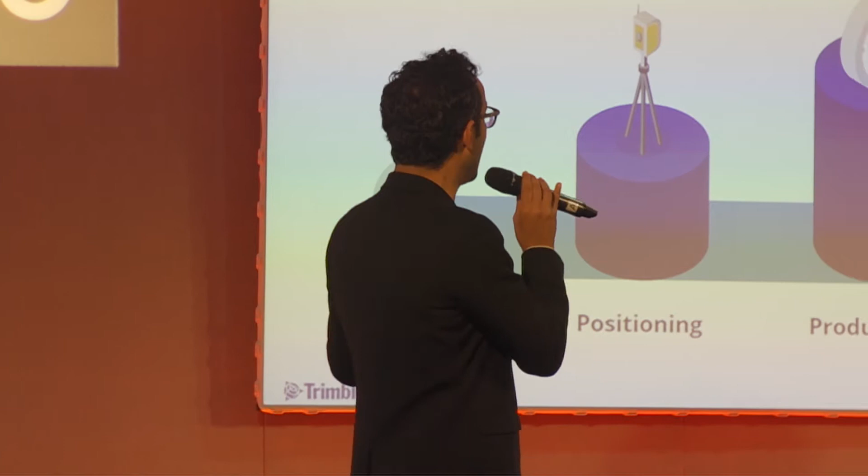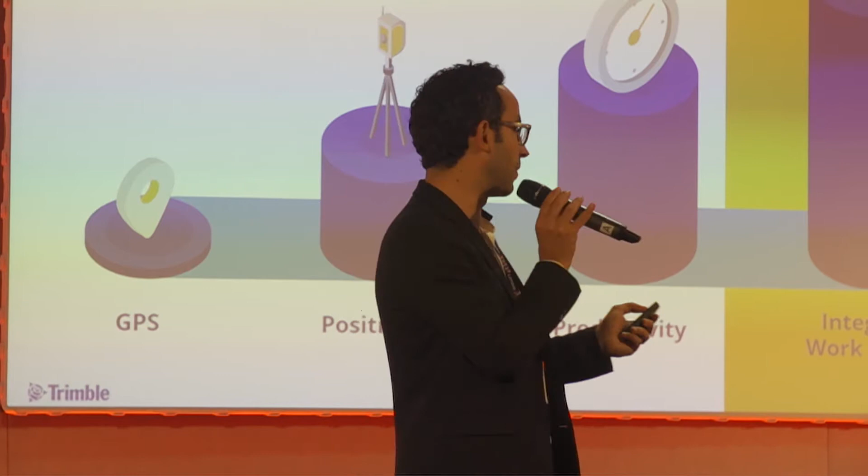But then we started addressing different profiles in the construction business. One of the first communities addressed was the surveyors, but then we started developing specific tools and software for the designers, no matter whether we talk about architecture, structures, MEP, and so on. And then after serving those communities, we started looking at the in-between, the connectivity between design and construction, between sub-phases, between trades, and so on. That's what we call the integrated work processes.

So we believe in this ongoing digital transformation, and we believe that this transformation will only be stable if it's positioned on 3 legs. One of them is the constructible. So today, the technology given to designers allows them to mimic what needs to be constructed. So we are shifting from this paradigm of just building a bunch of documentation to describe a building to something that's high fidelity, one-to-one. This is what we call the constructible model.

We believe in the content, the fact that we could mobilize manufacturing details in the early stage, and today you see there's a big trend of accessing not only 3D components, but also the knowledge from industrial people that could be mobilized in the early design stage, and the connectivity, which is, I think, one of the key drivers that will help to reshape the construction business.

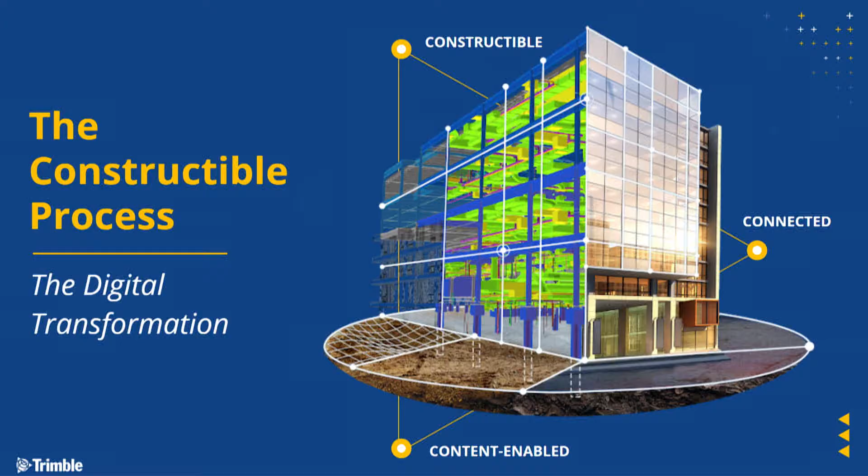This is an organization that I came from called Gehry Technologies. Initially, it was founded within the design side at Frank Gehry's office in Los Angeles. So we've been working on bridging the digital and the physical world, first of all between those physical models and the digital, with a very interesting combination of low-tech and high-tech.

So I have pictures from the early 90s where we have model makers, and then we reshape, bringing it into the computers and trying to mobilize other knowledge, such as mathematics, and then bringing it back. So I think this is probably what I found as a driver across all the presentations I attended this morning, trying to build this bidirectional link between the digital and the physical worlds.

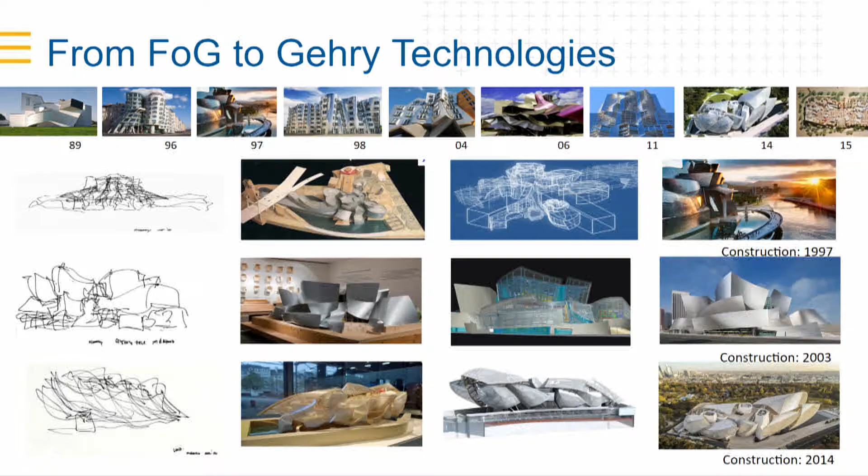So that's what we did within Frank and his project. We had been operating as the R&D group in the early 90s, but then we spun off and constituted our consultancy and service group, and we started working with Frank's ecosystem. Every project has designers, builders, and subs. Then we also started working in different geographies, and we expanded.

And we've been honored to get an international award three times for this BIM movement that you all know about. And we are taking one more step in our integration inside Trimble, and Gehry Technologies has been rebranded Trimble Consulting since last year.

So we've been seeing a lot of great stuff moving between those multi-realities. Reality is not only one, it's multiple, and we believe in each of them. VR, which is a fully immersive experience. We are working on the AR side as well, with partnerships like the Tango project with Google. And today the main focus will be mixed reality, which is the one-to-one overlay between the physical and digital world. This is another program that we are doing with Microsoft.

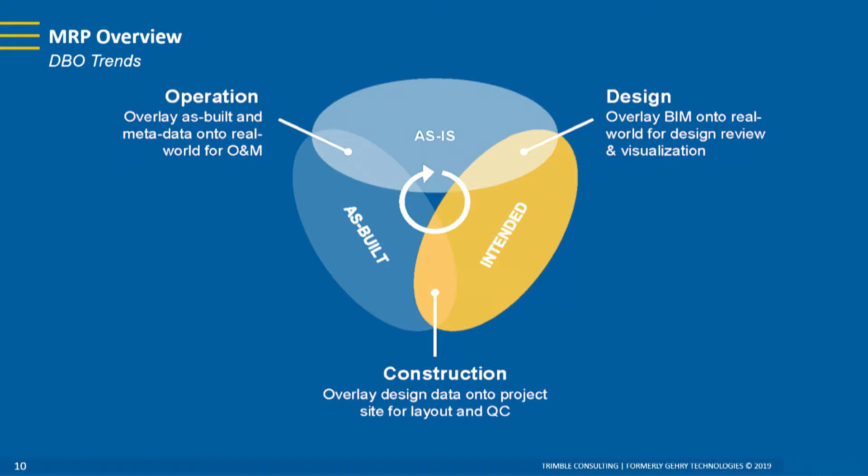I just put together a few examples of what we are doing in real life with customers on projects applying mixed reality. Number one, as a principle, we are working on what we call the democratization of 3D. 3D and BIM are not something for specialists, BIM managers, or highly skilled, sophisticated project audiences. We believe these things need to land in everybody's pocket, from workers to executives, with no distinction. We believe technology today is mature enough to arrive at this one-to-one scale overlay between what has been designed and what needs to be built.

And what we are addressing is what I call the key processes. Whether you put up a house, fancy towers in Dubai, or an airport, all those projects are driven by processes like design review, design coordination, construction sequencing, and comparison between planned and actuals.

So we associate the mixed reality to those key processes, and we found partners, clients, just to work with them to reshape and re-engineer those key processes.

Next, please. So definitely there is a wow factor when we adopt those new technologies. But these wow factors just get out after a few seconds. It's not even a few minutes. So what we try to find is people that are addressing a specific process or workflow and work with them to project the mixed reality technology within their existing practice.

So we have examples that we're going to walk you through, done with designers, done with engineers, with fabricators on construction site. And our role as Gehry Technologies is working side by side with the Trimble folk. We always had this mixed blood, having people, engineers, architects, computer scientists. We've always been working on system integration.

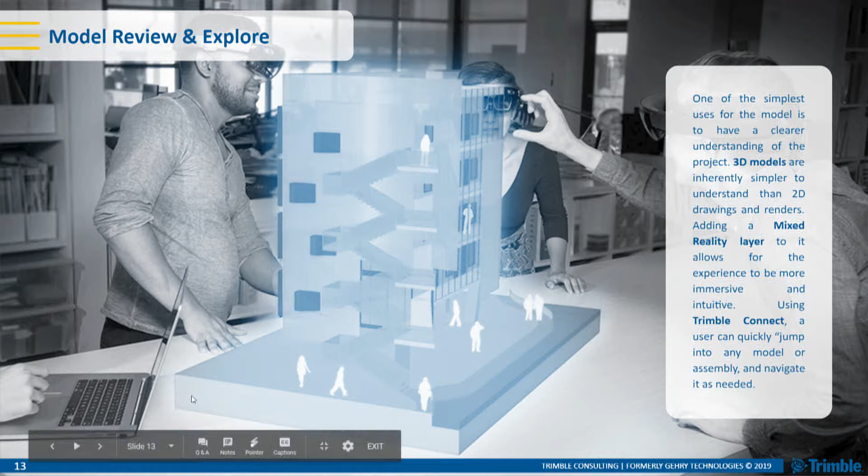Sorry, classic when you talk technology, all the projection. Okay.

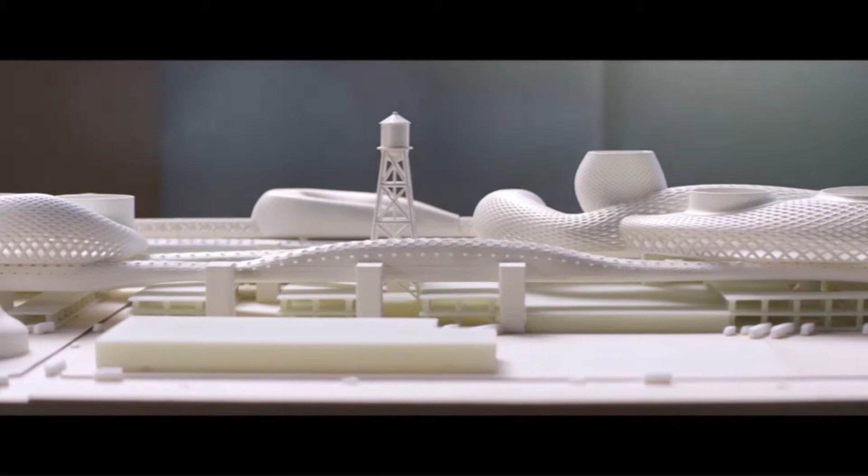So we built a model, but we used HoloLens to get us inside some of those spaces. I didn't know how big our site was compared to corporate headquarters or museums. With Trimble Connect, I can look up and grab different buildings to compare. We could just pull a model and duplicate it and see that it would take 12 Tate Moderns to fill the site. That brought it to life in terms of use.

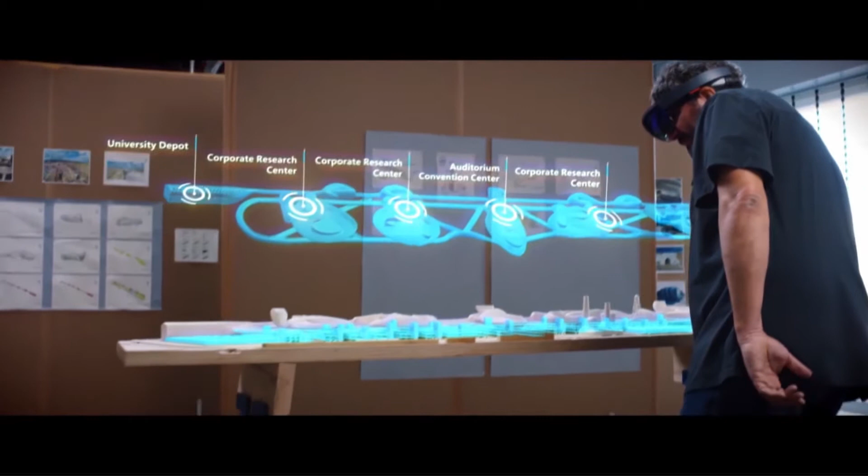Microsoft HoloLens lets us get inside stuff earlier and experience it, and I can look up and see the volume that I'm in and start to make decisions about how to design it. Without a HoloLens, I would have been making those decisions 3-4 months from now. But with the HoloLens, I'm making those decisions at the moment of inception.

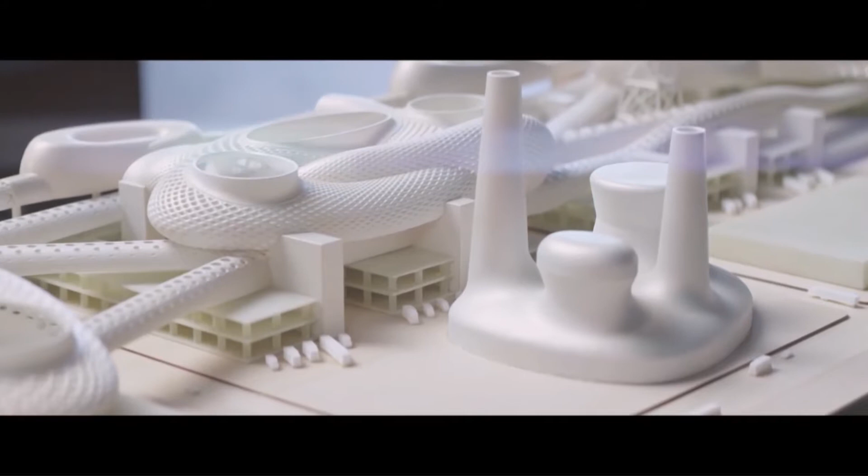So architects are always given two major inputs, an existing condition, a site, a location, and also a program. This one was very interesting. This project is in Detroit. You know, Detroit had a fantastic car business, but back in the 50s, these things dropped down.

This project is like a kilometer long, so the architect needs to take those existing conditions and try to imagine, to compute the opportunities to refashion it for new use. And it allowed him to shorten the design cycle in order to take decisions on it.

This is something very interesting as well, this basic thing that we call the design review. We've all been in many meeting rooms where people are debating, architects and engineers and so on. This work was done with AECOM, and it's a very interesting new experience. Generally, those 1-hour meetings now are taking 15 to 20 minutes. We don't need chairs anymore. And it's weird when you get to the room and you see all those adults just playing with their fingers.

But then when you start seeing what they have on screen, next video, please, you see the level of interaction and the focus that we have to go to the right set of problems or issues that need to be discussed, mixing the expertise, getting to a consensus and a solution, and getting to the next problems and so on.

So if the link doesn't work, it's okay. We could just skip and go to the next one, please.

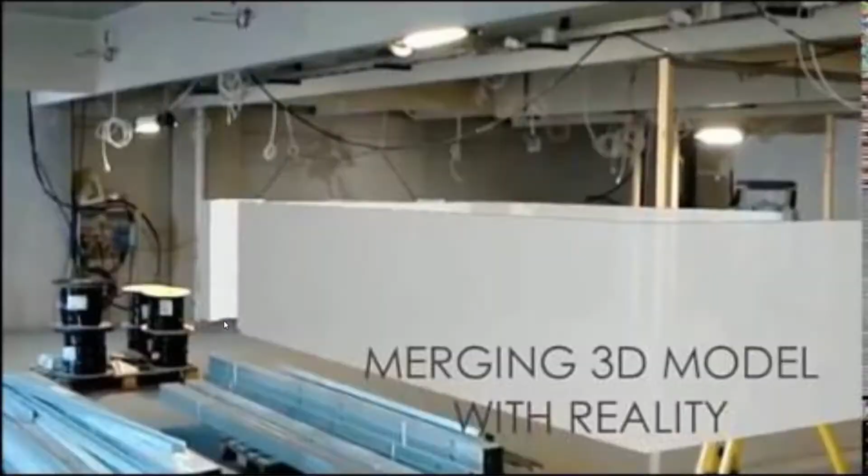So as you see here, we've been trying to project the use of this mixed reality through the different phases, starting from planning, early design, getting to the design detailing and engineering, and getting to the construction side. So this is going too fast. Okay, whoa. Okay. Quality control, for example. We have different examples.

Next slide, please. Thank you.

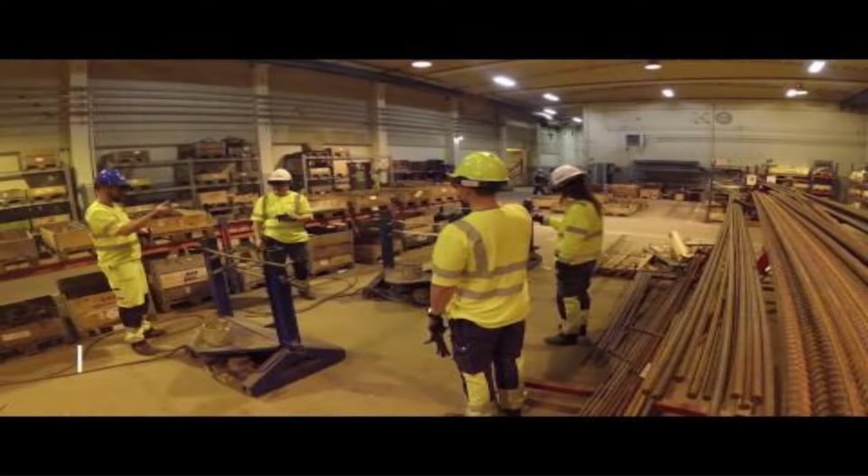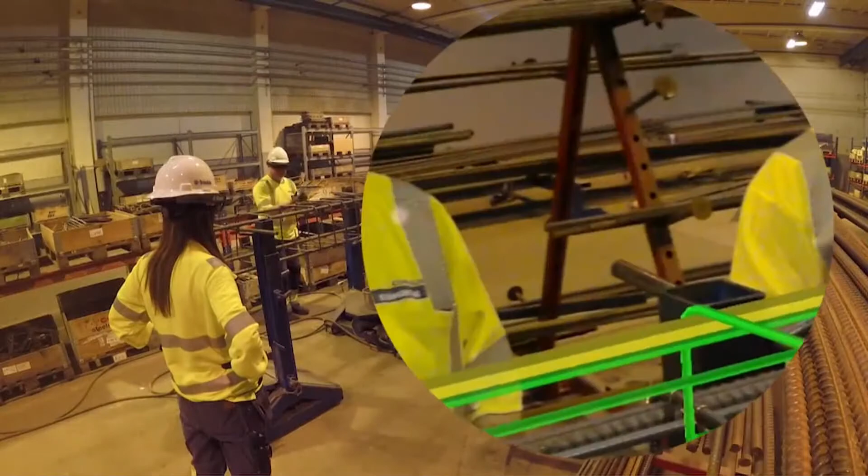So we brought this XR into factories for prefab concrete and rebar production. We could just play the videos. And those people, when they are shaping those components and subcomponents, could just overlay what is supposed to be, especially when you have a complex rebar design, and just approve intermediate steps and give the go to the next, and so on, before even shipping those to the job sites.

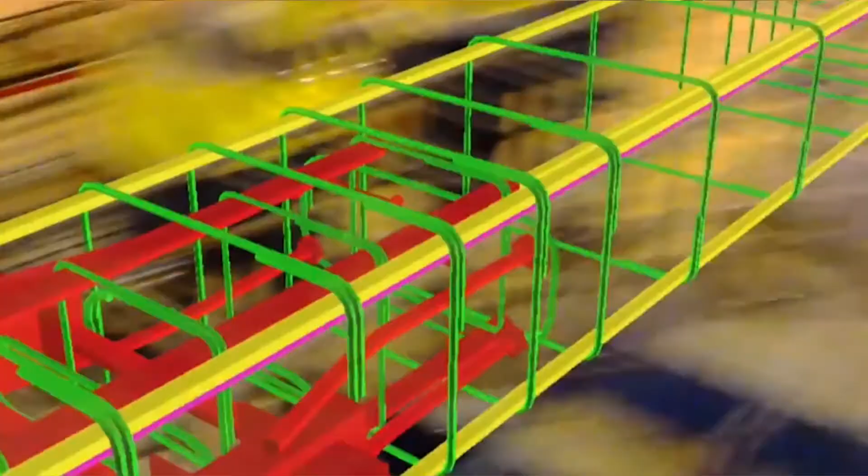We've been working also on a nuclear project, which is almost organized chaos of rebars, where there's almost no space for concrete. And there are always critical steps, because there's a step where people are blind, where you have the molds and the counter mold, and there is some overlay between design, and we work with color coding processes just to understand if everything is as it should be with the given tolerances.

Another potential, where there is way more to invent than what has been done, is when we deliver the buildings and when objects become an asset. So we've been working with people like Brookfield and trying to see what second life those databases that have been produced during design and during construction could take.

Okay, sorry, it's not as fluent as it should be, but it's okay.

And it's very interesting to see what kind of second life these things need to take. And then we could mobilize two types of information. We have the geometry, but we have substantially metadata that could be used within the geometry. And we developed use cases where we could just arrive, for example, in this space, and I could have my helmet and say, okay, can you check the video projector, the jack, because that's why it doesn't work on my laptop, and just make a work order? Or can you check the history of inspection of something like this? And the model becomes the building itself.

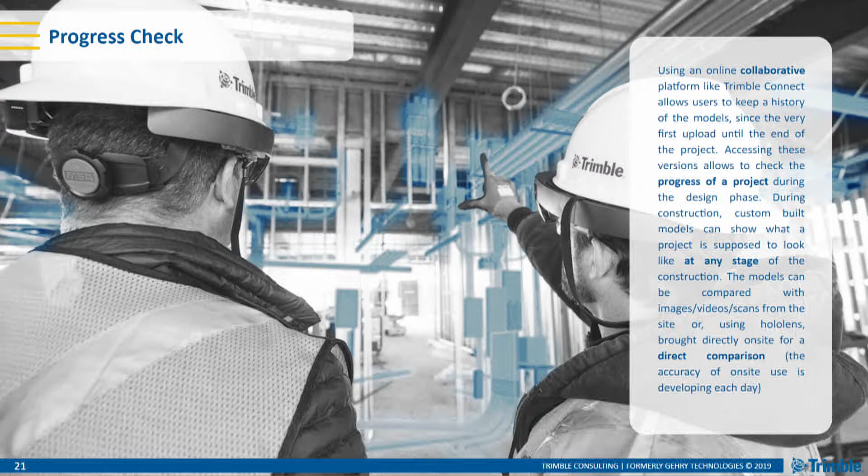Next, please. Sorry, this is the step in between, which is the construction. We need to build it first before getting to the physical asset. So here the use case is very simple: you arrive on a job site and you could just accelerate to say, okay, what will the job site look like after one month, after one quarter. And you could, during the installation and so on, see if these things have been made as planned, if there's any interaction that needs to be done. So yeah, there are fantastic possibilities to consume the design model within the job sites through these XR technologies.

So we could just go to the last one. So this is what I was mentioning, that the building itself became the model, and because of the georeferencing, this column could host all the properties to understand how many megapascals, whatever. All this information could be embedded into it, and we could just dive in, and the building will be the host, will be the database itself. And we are working on connectivity with CAFM systems and so on. As I said, there's much more maturity in design and construction when you talk about technology adoption. So this is probably the third wave of adoption, for facilities management and operators.

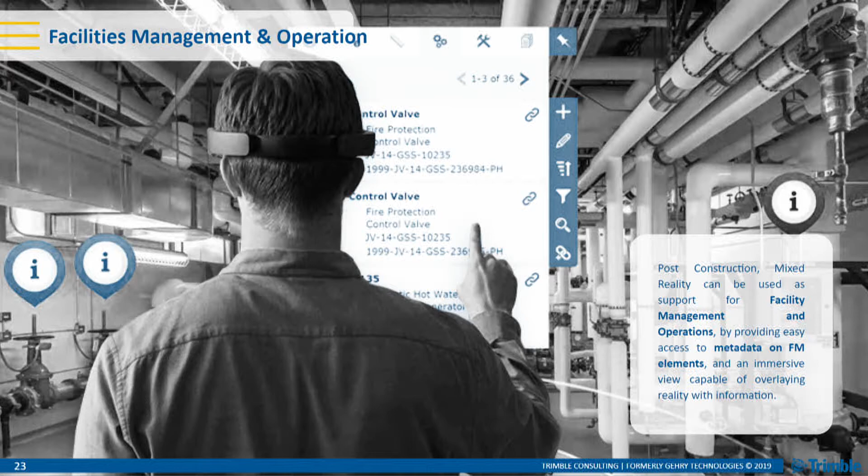There are normally videos that should play after this one. So, as I say, this is a technical component, but when you click on it, only with one finger, it could display technical specifications, warranties, and so on. And the building could have another fashion of approach, talking about performance, productivity, and just retrieving fundamental operations to understand how much it costs on a yearly basis to run these assets particularly.

And Trimble is a very fascinating place because they are serving, as I said, many industries. I've recently been multiple times in South Africa dealing with the mining business, which has nothing to do with me, trained as an architect. And it's quite sophisticated how mining is operating today, way more than a construction job site. So those technologies also have limits between indoor and outdoor. So there's a very great testimony about how the mining business is also adopting XR. So we could just play the next video, please.

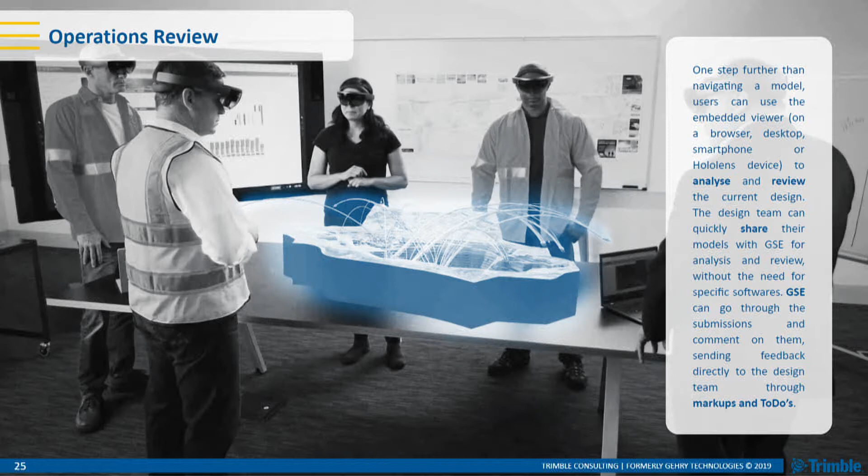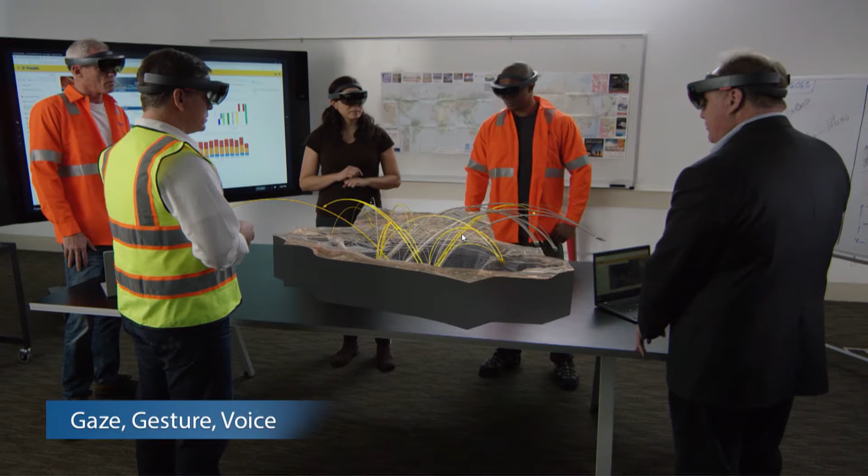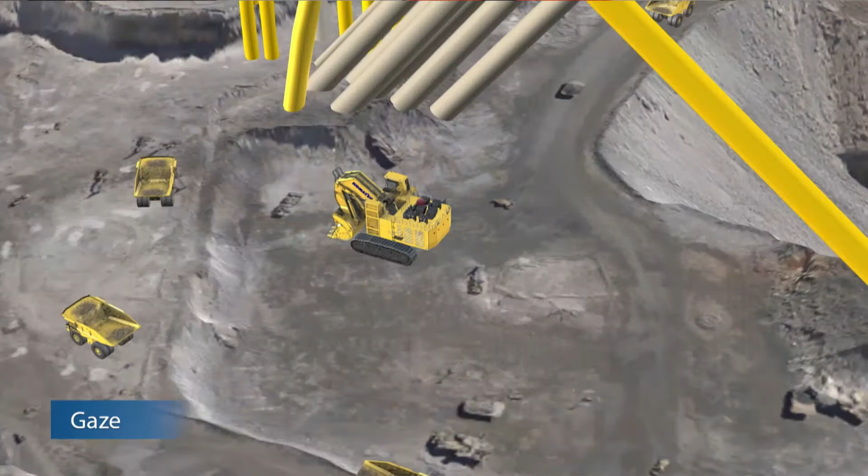The HoloLens uses gaze, gesture, and voice inputs. Your gaze, similar to your mouse, controls your cursor. Move your head around, and your cursor follows, centered in your field of view. Select a hologram by using gestures. The HoloLens sensors track specific movements of your hands, and by using the AirTap gesture, you can select particular areas

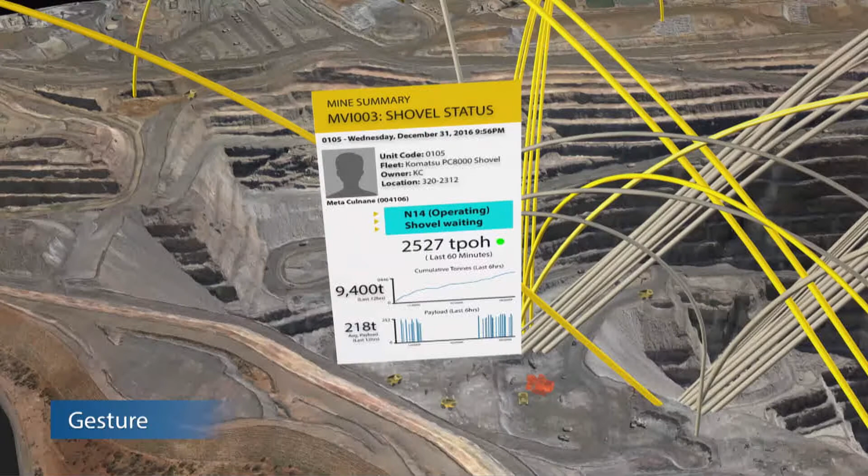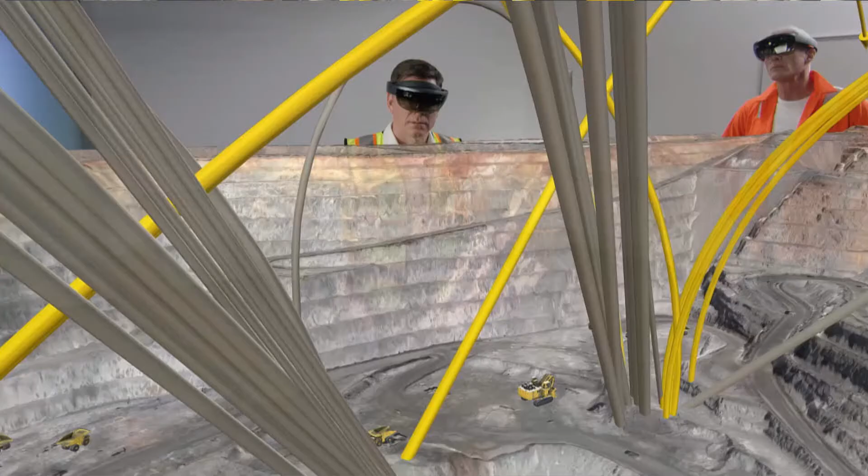inside the mine. With Trimble Connected Mine, your voice commands allow easy engagement with the mine holograms. Once you've targeted the hologram with your gaze, use the voice command Teleport, and you're immediately taken deep into the environment, seeing the mine at full scale. Safety concerns can make it difficult to allow people into the mine, but with HoloLens, you can move around the

mine holographically. So what you see here, there are additional constraints compared to a classical construction site job, which is safety and so on. And every single truck has a sensor, and you could be in London, and the mine is in South Africa, and you could see, with a lag of a few seconds, your live mine running. And if a truck is not where it should be, there is information, etc. So it's full connectivity between people and machines as well for this case study.

It's okay if the video doesn't work. There's plenty of available material on the internet, on YouTube.

So the way we engage in this journey, it's not the technology itself, but what we're interested in is how this piece of technology could help re-engineer some concepts, like progress checks and so on. That's more or less the first workshop that we host with our clients, and then we define a pilot and a project. And the goal is not just to leave it at the POC level, as a proof of concept. The idea is when we develop something, we go into a more industrial approach and inject it into their current workflows. So this is where we are today.

So I'm pretty sure that there is some enthusiasm, but probably there's even more skepticism with some of you. So let's just go to what potentially could be some resistance, and walk through them one by one. Probably most of you say, okay, yeah, but it's difficult, so it's easy just to still go with mouses and keyboards. Let's go to another one.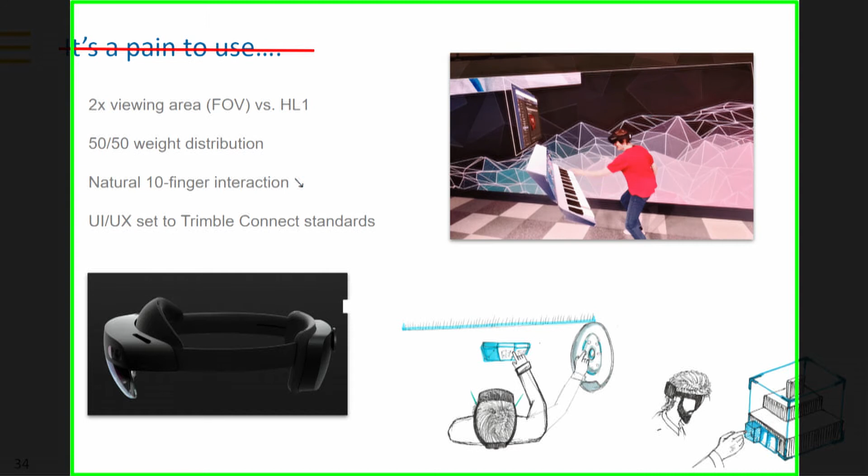Number 2, we've been talking about also the ergonomy. We learned as well because we could hold it for only a few minutes. So we changed the design to make it clear between the front and the back and ensure that you don't fall down. We work with ergonomists and so on to reshape this technology. With 10 fingers interaction, the UI UX has also been reshaped. So next one, please. We're getting to the end.

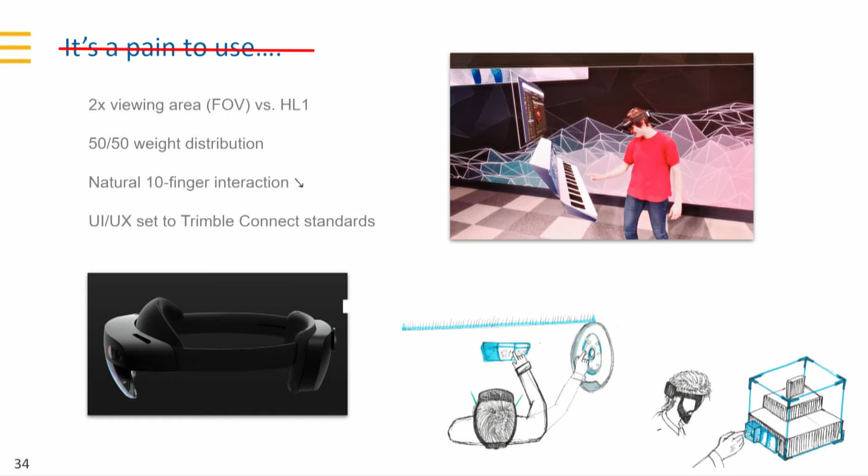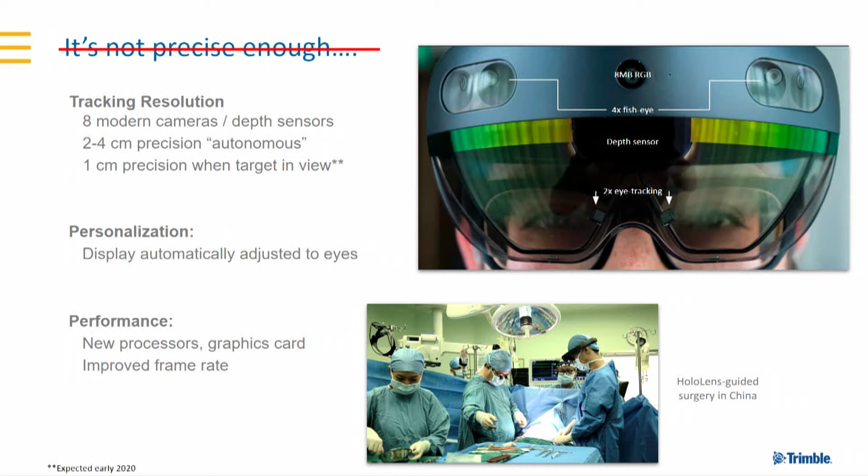It doesn't address only Trimble formats or Trimble software, there are other vendors and so on, because that's what every single project is made of. Multiple technologies, multiple softwares need to be combined together. I can make this comparison to music. Nobody tells musicians to use only guitars. So that's what the building will be and should be and is going to be. It's always a multiplicity of technologies that need to be combined all together.

For those of you who've experienced it before, you know that you need to log in. So if your name is Bob, it's okay. It's just 3 letters. But if you have a longer name, you already get sick before you even type in login and password. This one has iris, that is SSO for all the logins. You could just enjoy all the technology all together just with the iris authentication.

And the last one is about safety. We are working with personal protective equipment manufacturing standards to ensure working in different regions of the globe, EU, US, and elsewhere, so that this one will be fully compliant with the regulation. Those tablet things are really great, but for those who are spending time on a site job, when you are outside, first of all, you need hands. You cannot just have them only on a tablet. So it's hands-free.